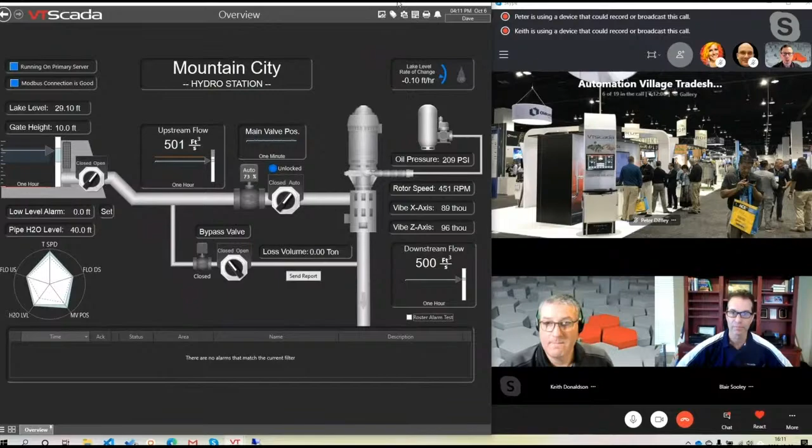So okay, I've got another computer. I don't know for sure if it will be able to connect to me or not, but I'm going to try to do that. So I've got my hydro station here, let's try to snap this guy over a little bit, make him even a little smaller than this. Oh, Skype came back, love that resize. So I've got my hydro station here, and I'm going to have my other server here.

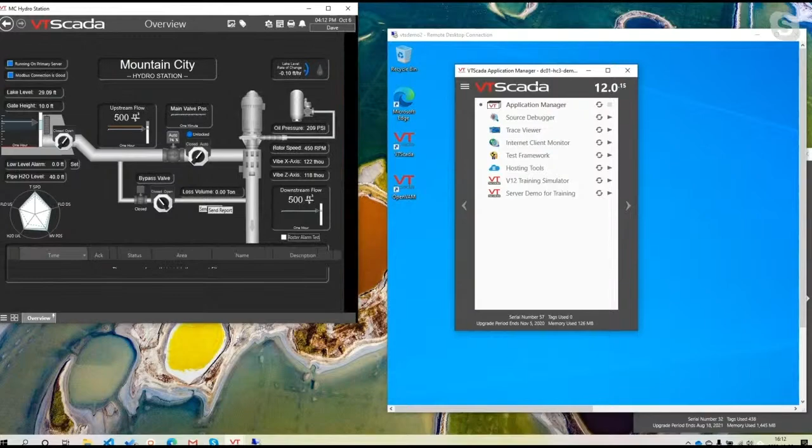So we're going to do a failover demo. For anyone watching, the first thing that I need - cool how Dave just resized his screen, and it automatically resized to whatever the resolution of the interface he has. Very helpful if you've got multiple screens up or different resolutions on your various screens in your application. Yeah, it's funny, it's the small things that we don't even think about anymore.

So what you're looking at here is a remote desktop into another computer. I'm just going to go to advanced here, get from workstation, and I'm going to hope that I can do name resolution. Can we do it?

All right, so here I've actually connected in from this remote computer that is at our headquarters in Bedford. I've connected back out to my house here, and I'm looking at my applications. So this is the Mountain City Hydro Station - that's this guy right here. So Dave lives at a hydro station, in case anyone's wondering. And oh, I need credentials, right.

So you need that administrative level credential to be able to grab an application. With a little bit of luck, this will come across. As I'm doing this over a VPN, and this demo is actually in a bit of a DMZ, so I'm not 100% sure if this will go totally flawlessly.

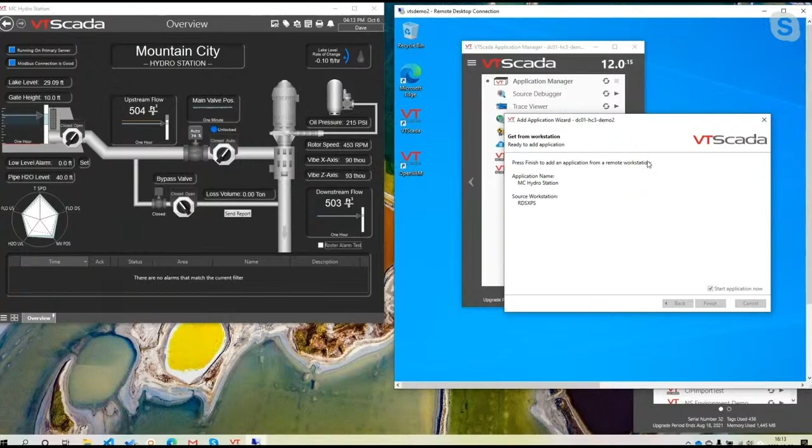If not, then Blair, are you on the VPN by chance? Yeah, I believe so. So if this doesn't work, then we may want to just do it between our computers. Oh, it looks like it did find a path here. Okay.

How much historical data have you got over there? Because it's pulling all of it now, I assume. Are you both on? You got both of them on as servers? It is pulling all of it. I'm hoping there's not that much on here. Probably collecting data at about once per second for a couple hundred.

While this is happening, I'm going to go through on this computer and do some configuration. We're going to go into the edit server list here. So you can see it's populated with my computer name. I'm just going to click that to make this guy the primary server, and the other one is VTS Demo 2 - we'll set that up to be the backup server. If I click apply, then I've set that up. So I'm the primary, VTS Demo 2 is the backup.

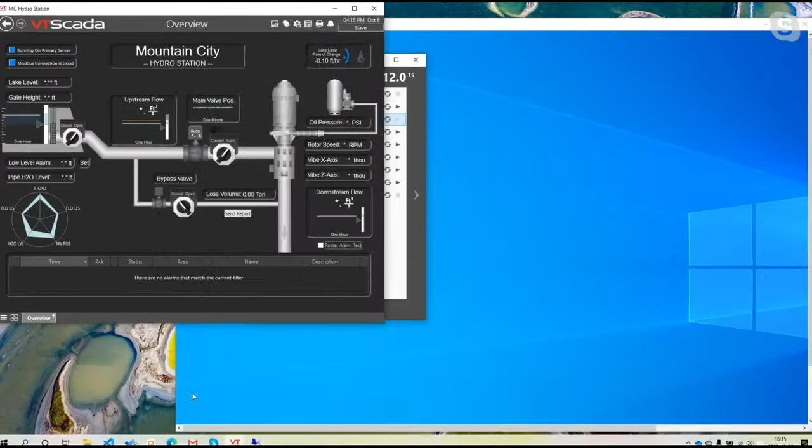Okay, so the next thing I'm going to do is run into the trace viewer. Oh, not that trace viewer, I wanted my own trace viewer. The next thing here, I'm going to grab the trace viewer, and in this case we're just going to quickly take a look at the RPC diagnostics. There's going to be lots and lots going on.

So we'll look at the services. You see all the applications that are running here are running myself as a service, but you can see here there's some things running VTS Demo 2 as a service as well. So right now things are still getting synchronized across here. It looks like I'm running into some bandwidth issues between the two computers.

Do we want to continue logging? No, I do not.

So the hydro station here, are we running? I may have a screen issue here because it looks like it is actually running the application, but I can't see it on this remote desktop. Yeah, you have it open on the second screen by the looks of it. Yeah, it looks like that may be open on another screen.

So I'm just going to stop this guy quickly and start him up in another minute here, just to see if I have a little better luck getting him on this screen. This VTS Demo 2 had Windows reinstalled on the weekend, so it sort of threw me through a bit of a loop - I don't know what it looks like anymore.

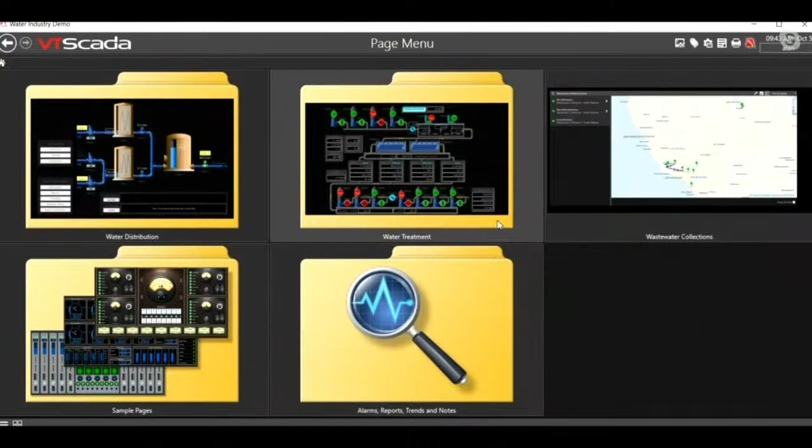So just a quick thing, and we'll go through this a little further later on. If I look at this water treatment folder, for example, we now have 4 live screens of data coming in. I think we have another breakout session on high performance graphics, on Idea Studio and those kind of things. So all of these graphics can be designed the way a customer would want them to see them. In my case, I can look over on the left-hand side under the overview, and I see not only an alarm banner at the bottom, but also this blinking red light.

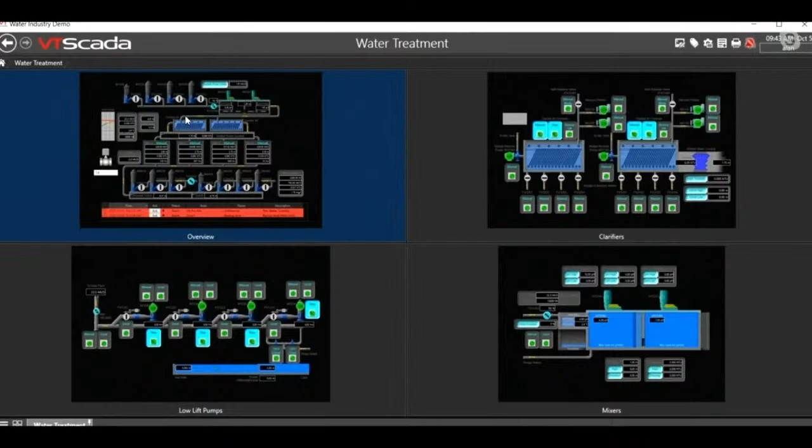And if I click on that screen, I now have a better visualization of that screen. I can see my alarms a little bit more closely here. If I look at this, we can see that it's a category of 1, and it's red, and it's a diamond. That all has to do with ISA 18.2 alarm management standards.

Again, a little more discussion for later on. But what VTScada lets me do with this is I could actually right-click on that little flashing light, and now I can do a variety of things with that alarm. I can go straight to the properties. I can look at the alarm settings and those kind of things right from the screen. But that's for a different conversation.

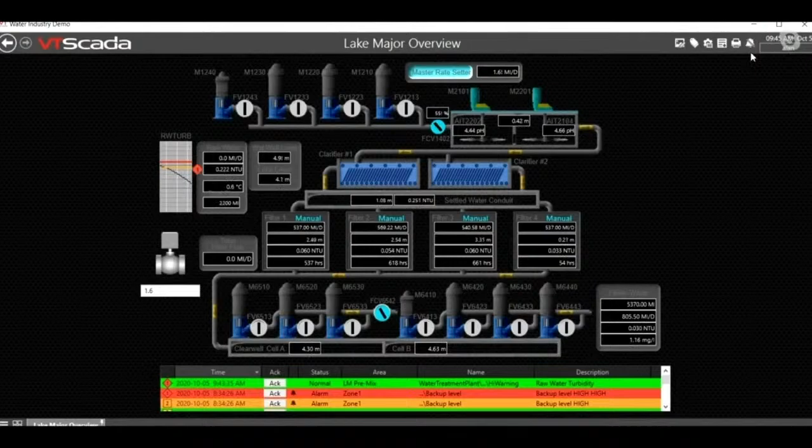Just for the mini session for the moment, I got about 6 minutes. I'm going to go to the top right-hand side. In my world, I would probably, if I'm designing a screen or I'm the operator or manager, I might not care about this alarm banner at the bottom unless I want to use area filtering to only show alarms that would be pertinent for this screen in this area of the plant. But I'm going to go to the top right-hand side where that alarm bell is blinking. It tells me I have some alarms there that are unacknowledged. If I simply click on that, I now have my alarm page.

I notice there's a lot of red going on here, and the reason for that is I have a high turbidity warning going off on and on and on. This is my demo, so it is designed to do this. Please don't be too concerned. It's designed for this. But within this, I just want to show a couple of quick things of what alarm management techniques let someone do these days.

For one thing, it lets us take care of the criticality of an alarm, or the priority perhaps. And so on the left-hand side, it shows that that is a priority of critical. So within ISA 18.2, we now have 5 levels of alarming. We have critical, which is number 1. We have high, which is number 2. Both of those would declare something about either plant safety and/or life safety and/or process safety. And then we have 3 others: a warning, an event, and a notice.

And so in the old days, what would happen is any alarm that would go off - let's just say we had a very low priority alarm go off for a low level, hey, somebody ought to go take a look at this thing in the next week. And yet, because of the way we defined alarms, it would still notify somebody at 2 a.m., which was not really appropriate. But if you had a chlorine leak at 2 a.m., clearly you want that to take place. So that's one of the things you would see here.

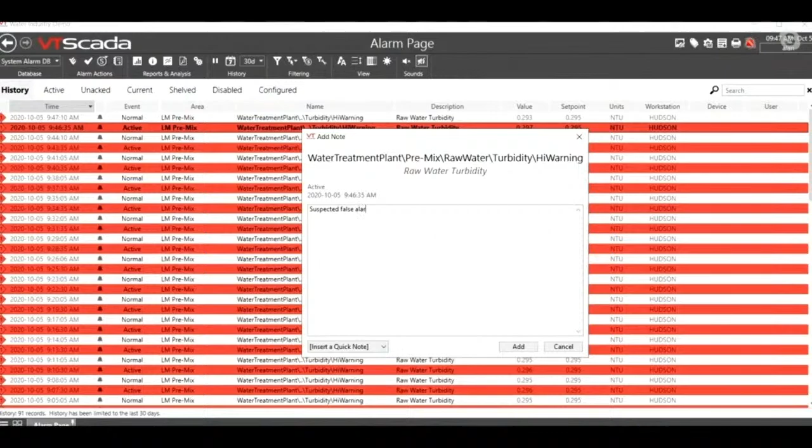What this lets me do in a couple of different ways is this. For example, I could take this active warning here, right-click, and add a quick note to this, maybe 'suspected false alarm.' How about that? So an operator with the right username, password, priority privileges could now type in a note - say 'suspected false alarm,' okay? And when they press add, you'll see on the right-hand side we now have an indication of that note. That's very unique for us, but we think it's so important that an operator has the ability of putting that in. So watch this though.

Let me go into my current alarms. Here's some things that we look at that I think are so powerful - only got a minute and a half, I know that. So I'm looking at these alarms that are current right now. I could actually click on this reports and analysis, and watch this. It's telling me that in the last 30 days - let me go to the last 10 days - it tells me that the pre-mix turbidity alarm has gone off 39 times.

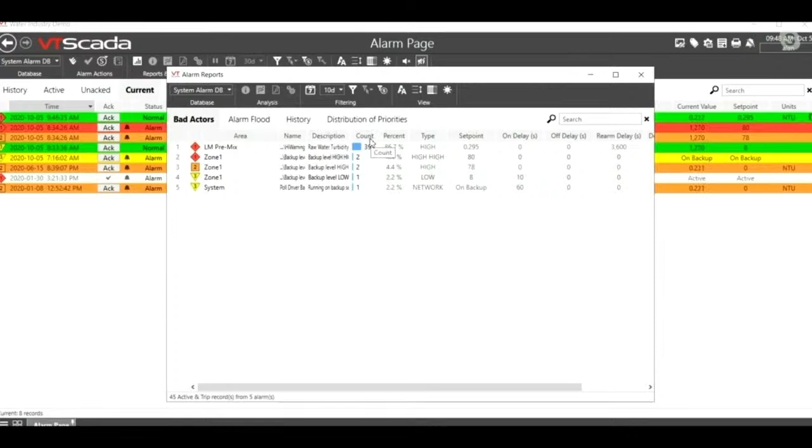So now let's say the plant manager comes in on a Monday and he sees his bad actors, as we call it, of alarms. They know what to go take a look at first. I can then look at my alarm flood and see when these things occurred.

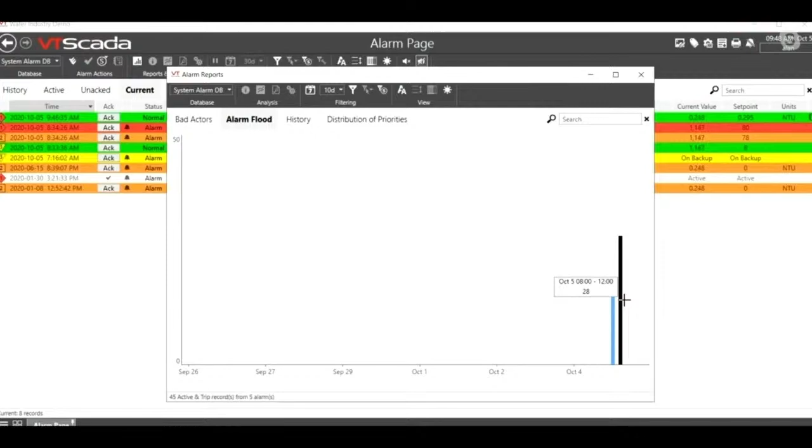Well, clearly I'm running a demo here. But what I could do is, you can see that time block is a 4-hour span from 8 until 12. If I click on that, I now have it in 30-minute long blocks. Again, those are some of the tools and analysis that really make managing alarms very powerful.

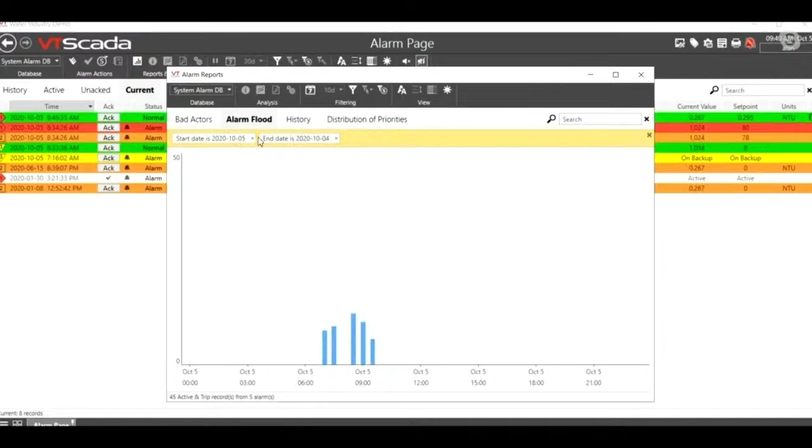You can see up here, start date and end dates. I can actually change any of that around if I want to. I can look at a whole filtering area here, and I can now filter my alarms by certain descriptions or other areas or different dates and times and whatever. All of that becomes how I want to manage my alarms, to look at it more closely and make things happen.

Let me finish out with one quick part here. It's my favorite part of our alarm management, and that would be shelving of alarms. So I started off with that story about the alarm annunciator and the guy pulling out that board an eighth of an inch.

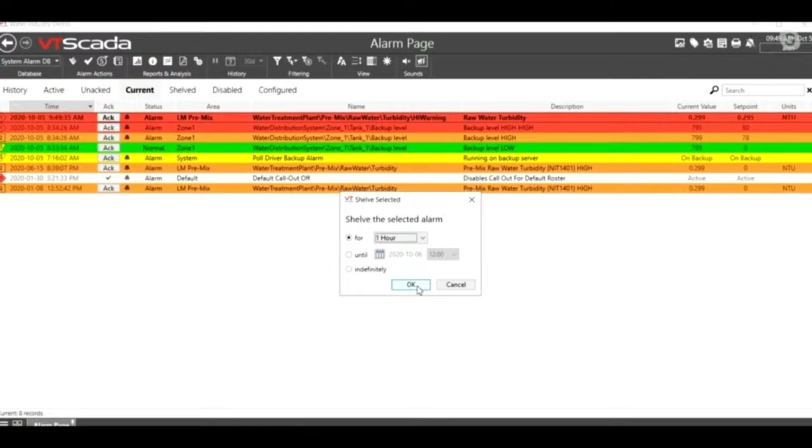Let me take this same turbidity warning. I can right click on that and say, you know what, I'm going to shelve that. And you know what, George ought to go take a look at this suspected false alarm, and I'm going to shelve it for 1 hour because he just stepped out to go browse the hall, and he'll be back in an hour. I press OK. I'll put a note in there: shelved while waiting on George.

I think that's who I said - while waiting on George to return. And then, lo and behold, I press add. It is now off of my current alarm list.

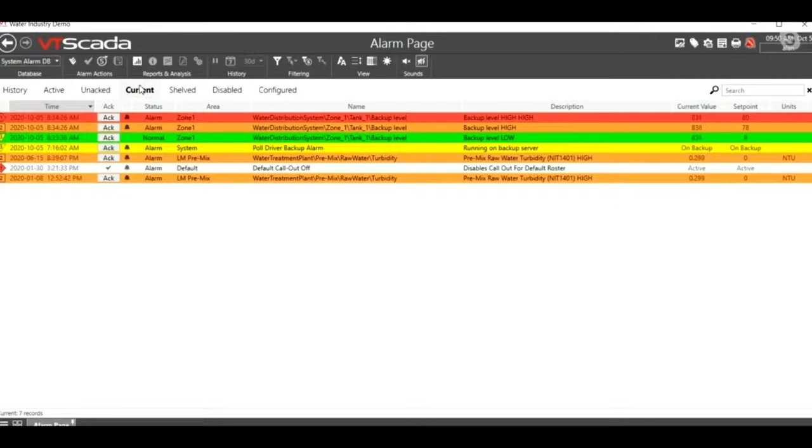George comes back from browsing the trade show hall. He can click on shelved. He can see every instance of an alarm that was shelved by an operator. In fact, in this case, it would say it was shelved by Alan under the user on the far right-hand side. And then here are the notes associated with that.

So how cool is that - you can now give complete control of alarm analysis into your operator level people. So I know I only had 10 minutes, but my time is up on that one.

I will unshare my screen because you're probably saying, hurry up, Alan, get out of here. The elevator has long since stopped. Yep, you're doing a great job, Alan. And next up, Chris and I will struggle to answer questions that will keep us our jobs. So I was quite happy if you were going to go through. Hey, what I have found over the years is if you make things complex enough, nobody asks too many more questions. There you go.

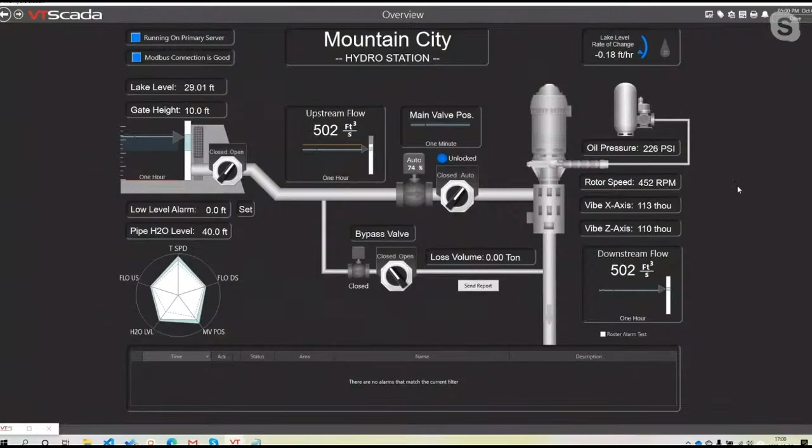So anybody who wants can go into any page. If we want, I can even grab a widget here, copy it, and go into Notepad. So I copied Control-C, Control-V into Notepad, and there you'll see the code for that widget, right there, just as text. So I could actually make changes to it if I wanted to, and paste it back right in here, and it would appear as an object on the screen. So you use the term object, and VTScada does use an object-oriented scripting language, for anyone who's questioning that.

So at this point, we've moved into our next segment, the hands-on demo. Do you have a preference - do you want to do some dragging and dropping, or shall I? I'll let you do it, I'll comment on it, and then I can share my screen after and do mine if you'd like. Okay, let me switch screens. There we go, can you see my screen? I can now, yes. Okay, great.

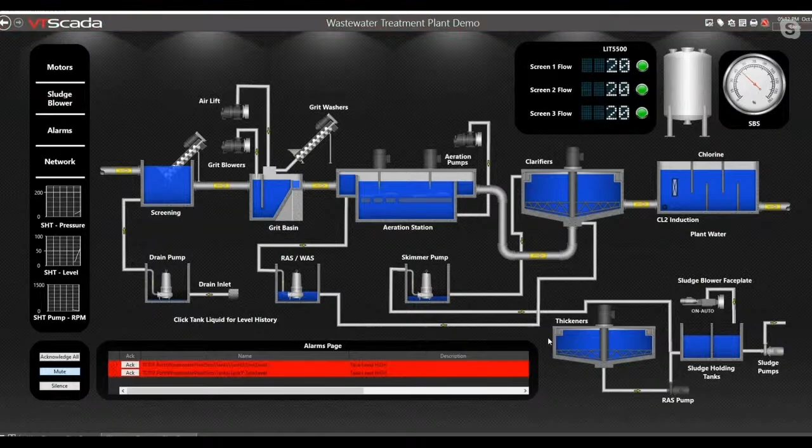So this is just our wastewater treatment plant demo, which you may have seen a few times today. As we've mentioned, this particular screen was created all with drag and drop elements. If we go to our tiled page menu and navigate around a little bit, you'll see this menu itself was built out of the box. It's one of those standard features that when you create a brand new application, you don't have to set up at all. Every time you add a new page as a developer, it asks, do you want me to add this to the menu? And you say yeah, and it gets added to this tiled page menu. We've got these three pretty pages, which were all made with our Idea Studio using built-in widgets and images.

These are basically meant to drag people into the trade show booth. They're not super great HMIs, but they're pretty impressive on a trade show floor and a great way to start conversations. But they were all created using the Idea Studio.

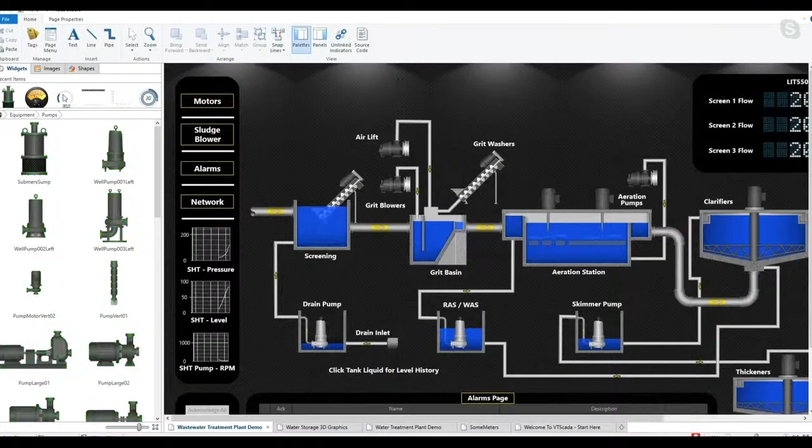So I'm logged in here, so I'm just going to open that up. And this is what it looks like. If you take a second and get your bearings and look along the top of the screen, you'll see a menu that looks very familiar if you've ever used Word or PowerPoint or anything in Microsoft Office. I'm assuming almost everybody has had that experience.

So it's a context-sensitive menu. If I select an image, for example, I'm able to immediately access the properties that are unique to that, or I can simply right-click and go Properties. There's always a couple of ways of doing things.

Now, of course, we're all dragging and dropping, so I can go into any of these folders full of pre-built widgets. And a widget - I think every SCADA platform has their equivalent of what we call a widget - it's basically a fused together combination of I/O data and images and shapes. This one is meant to take a parameter, which is an analog status level, so I can just drag that on.

Our widgets, Chris, from what I've seen, is when you drop them on there, they always have behavior to them, almost like a simulator that's kind of running, moving the needle or so forth. So you get an indication of what that's really going to do for you when you hook it up to an I/O. And that's pretty unique to VTScada - I've never seen that with any other SCADA packages.

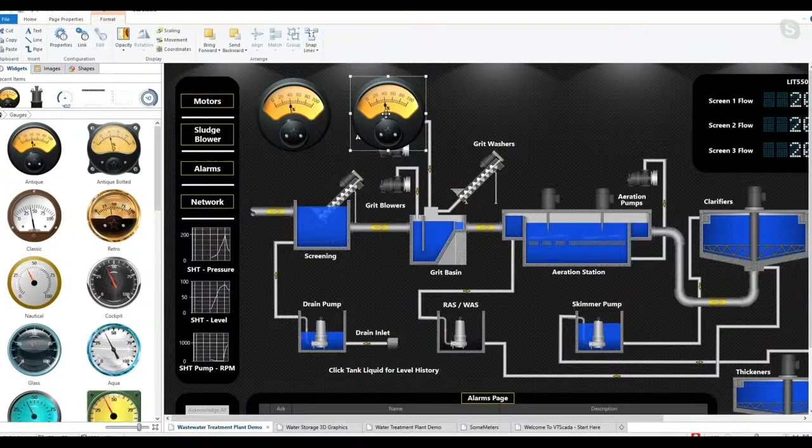Something I find when I look at applications created for the real world, and frequently this is true, they aren't beautiful. The screens, all the data's there, they got it there, they hit their deadline, but there's not a line item on a spec that says make everything line up so it doesn't make A-type personality people crazy. VTScada kind of makes it difficult to do otherwise.

You can very easily select multiple things, you can align them very easily, they give you sort of a guide. If I do that again and hit Control-C and V, you'll see it's automatically giving me a sense of when things are lined up. When you're lined up, it has those little grid lines that pop up. Yes, exactly - I've had too much coffee today.

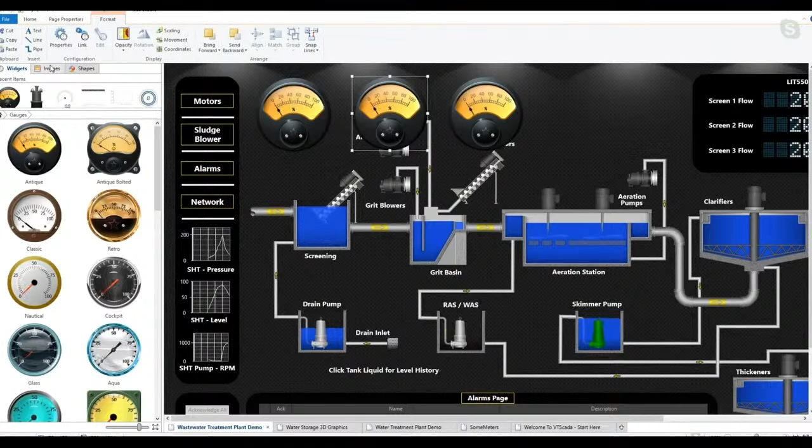What you can do is drag everything onto the screen, make it look just the way you like, and then decorate it with various kinds of images. Actually, you can see here we've got this lighting effect built in that simulates a discrete area. So these things can be decorative, of course, but they also kind of focus the eyes, and can be used to create these discrete functional areas.

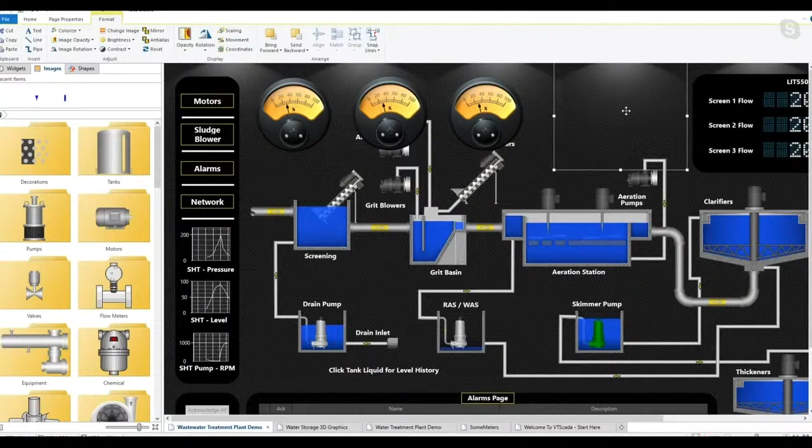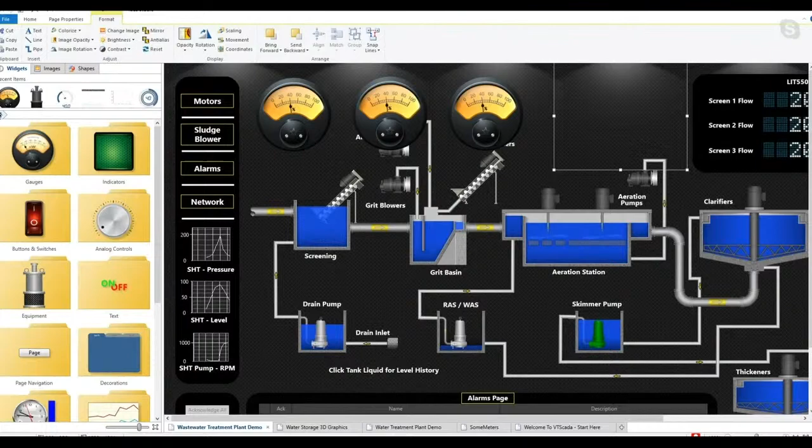And of course, this is not a high performance type screen - many of you, I'm sure, are already shouting at your monitors. Over on the left, you can actually see some more high performance style widgets and shapes that we've got. Actually, the widgets look like this. All these widgets are built in, and to support high performance or any kind of screen design methodology...

You can see that just like Tim just said, that dial pointed out why that dial is cycling back and forth. Similarly, these shapes are cycling through color to show you that you can put process data through this widget to adjust its color, which is part of the methodology of high performance HMI.

So I'm just going to show you something really fun here. I'm going to take - I got 3 minutes. Well, that's good, I think that works out perfectly. I'm going to hit Control-C again because we have to cover the scripting part of this, so we'll do that in the micro, and then we'll do it in the macro.

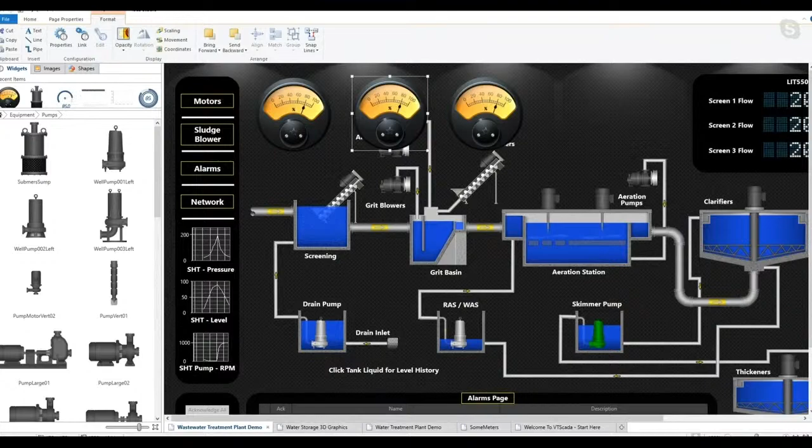So I'm just going to open up a notepad, and I'm going to hit paste. So I just copied the dial and hit paste in Notepad. Oh, I'm sharing my screen, not my window. Okay.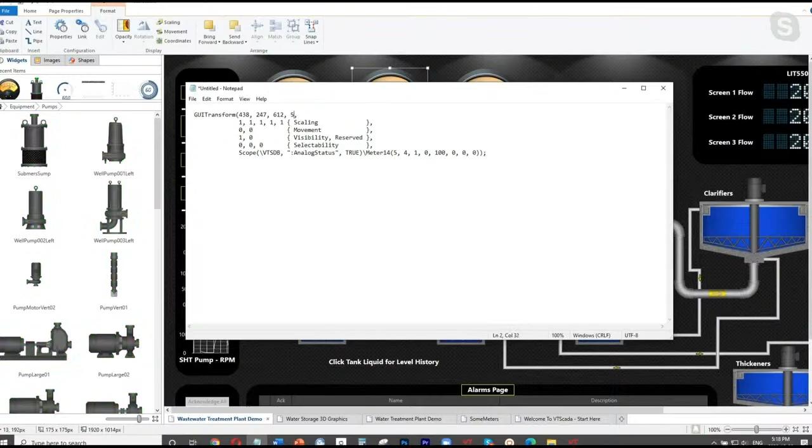So this is what that dial looks like in VTScada script. I can actually go in here and make some changes, although off the top of my head I don't know exactly what will happen. I guess these are the coordinates for the four points of the dial. I'm sure if I change them it would make it look quite weird. Let's make it look weird and see what that looks like. Now I'm going to copy this back, go back to the screen, and hit paste. And there it is.

You can see it's actually slightly oblong now because I've just gone in and messed with the coordinates. But that's an example of very quick, rapid prototyping - you can grab an item, quickly adjust its code, and drop it back in again. And if you want to see all of the code for this page, you can go to the source code button, and this will open up the VTScada script for this page in your chosen tagged text editor.

In this case I'm using Ultra Edit, so you can see it's very similar. They all kind of follow this similar structure. Once you get into it, it doesn't take very long before you start to read the code as if it looked like dials, kind of like looking at the Matrix. So again, you have the best of both worlds - you've got the control of being able to work with script, and the flexibility and reliability of working with standard drag and drop features.

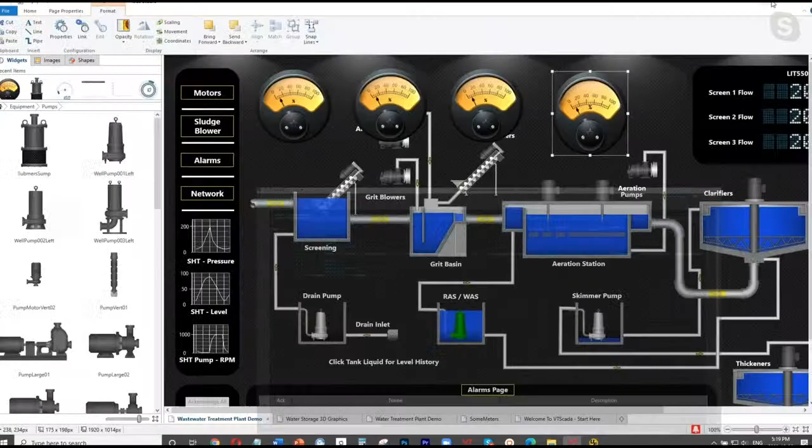Now we're sort of coming into the finish line here. Tim, is there anything I haven't covered? I was going to point out you were doing your selecting when you pasted down a couple of different gauges.

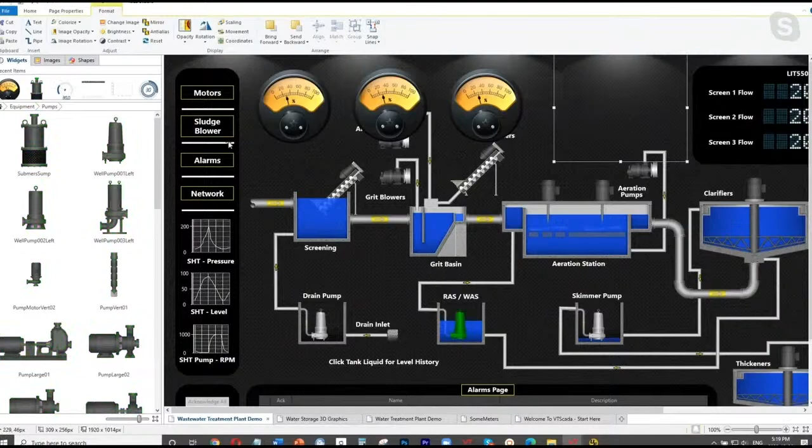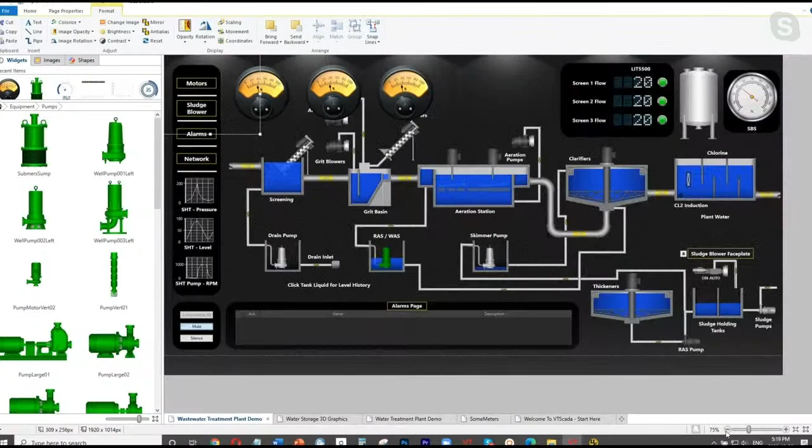What I really like about VTScada is there's so many different ways to select objects on your screen. If you go from left to right or right to left, it changes the way you're selecting those. If you go left to right, you don't have to have the whole object, just a piece of it. But if you go from right to left, you select the whole object, and only those objects get pasted into your grab. It's true, so I just went left and selected. I think you go one way and you get everything that you touch, and you go the other way and you only get the things that you completely cover.

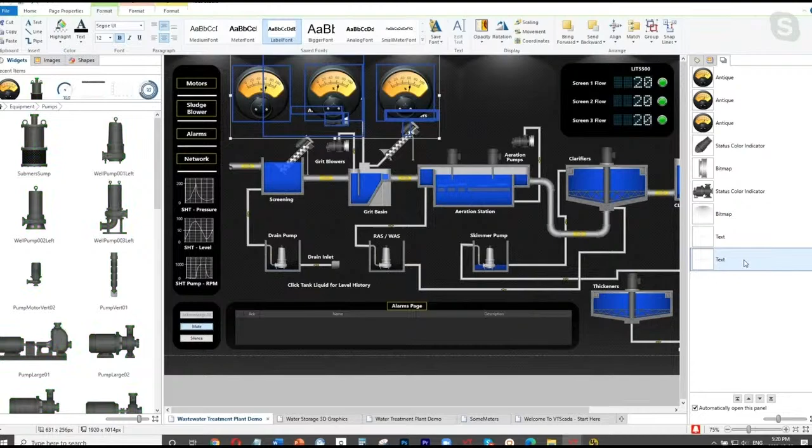And then also from the menu bar, you can select - let's say I just want to select the text on my page, I can do that as well. Exactly, over here, so you don't have to go and hold your control key down and click the particular object. Oh geez, I missed one - oh no, and then go back and change it. We make it a lot easier for your screen design to be able to select things a certain way.

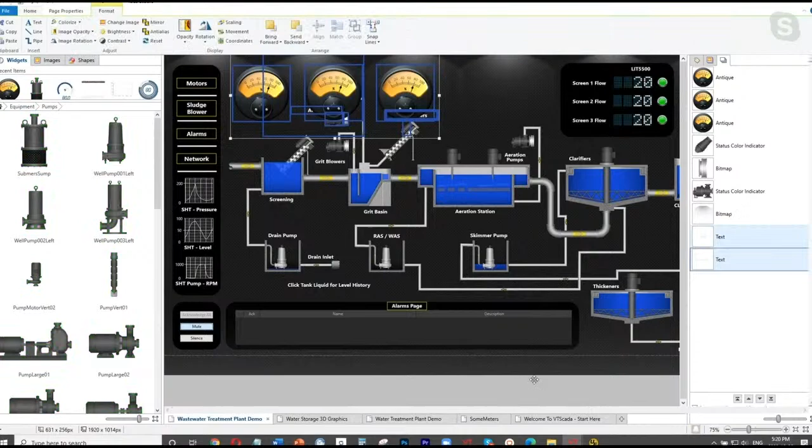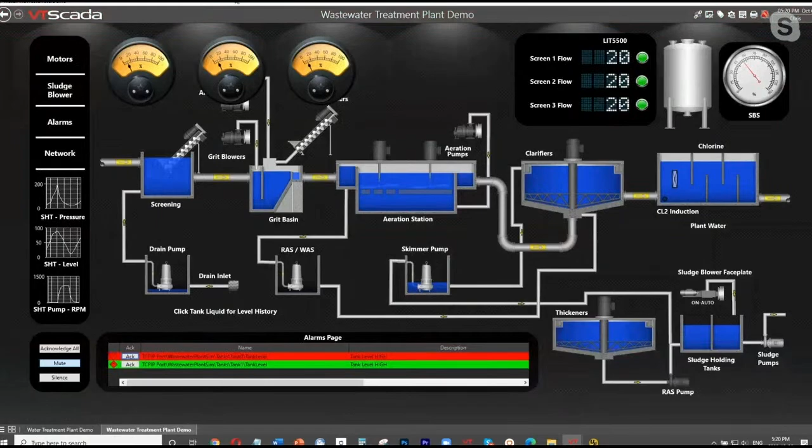That's true. And now I'm going to hit X to close the Idea Studio, and those will now be added to my screen, which is actually up here. There we go - not the most beautiful aesthetic choices that I've made, but I'm going to stand behind them unless I want to use version control to go in and roll them back. Hey, for a Tuesday afternoon, they look great. Thank you, this segment should be called 'Chris is Getting Punchy.'

So that's just sort of the briefest mile-high view of the difference between using scripting code and drag and drop features when designing screens.

Great, so I'm going to stop sharing and look back at our lineup here. Look at our notes here. I think we have another... we're at 20, so Tim - I think you get to do some driving now. Okay sure, yeah, I can go ahead and do that.

So I think what we have up here is trending. That's pretty wide open - I mean, we could be historical trending, we could talk about our trending widgets, a variety of different things. So let me share my screen. Give me one second, share screen.

And open up VTScada. Okay, are you seeing my tile? Sure, how's that, better? Great, still see you. Oh, fantastic.

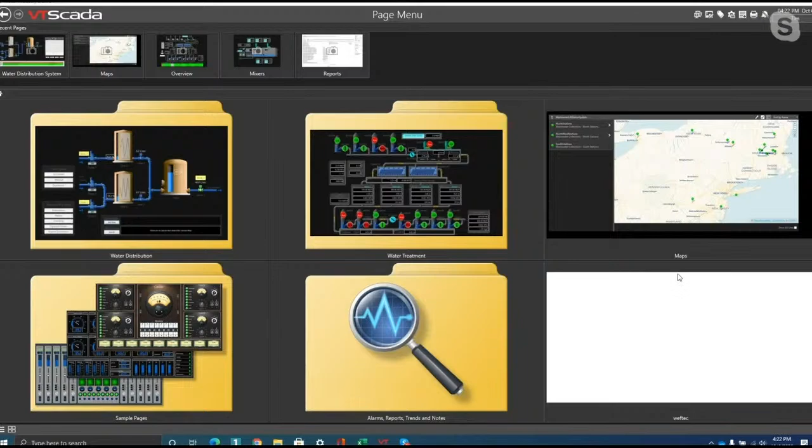So Chris has kind of gone over this particular look here. I'm going to get into it. First, I want to show you the historical data viewer and then some other trending items. I'm going to open up one of my screens. That is probably one of the features I like the best about VTScada. Actually, it's the feature I like the best.

I don't blame you, it's great. Goes back to it might have been one of the first things I saw with the product. In a demo application I built in a previous life, we built a lot around the historical data viewer, creating different pen groups and flipping between different screens for some analytic looks on some data. And just the flexibility of it, I was very intrigued with it. So that's what I like about it.

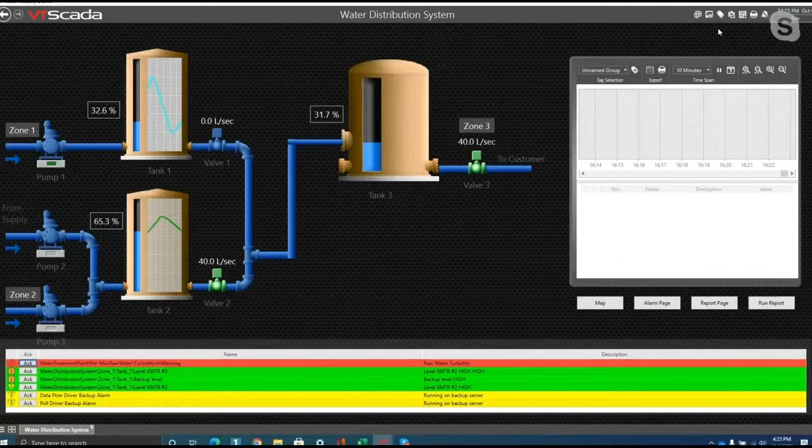What I have here on my screen is I actually have the historical data viewer built into my screen, but you don't need to use it from here. You can simply just go ahead and click on a value on your screen, and it will pop your historical data viewer.

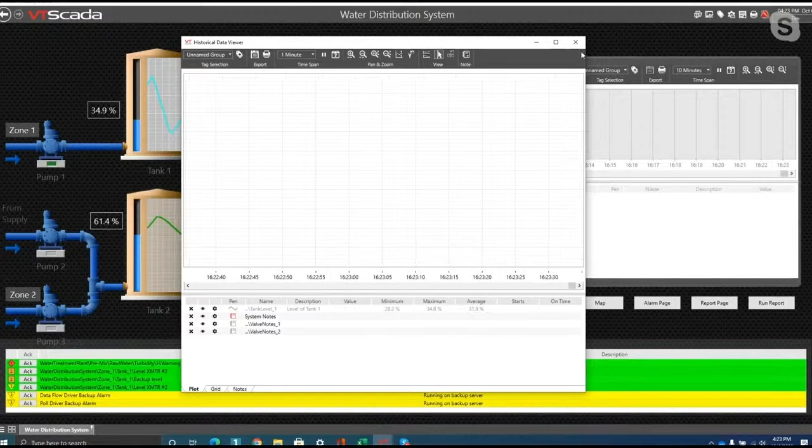And how come I'm not seeing any data? Oh, because I have the pen turned off. Let me make that visible. So I must have turned it off in a previous demo.

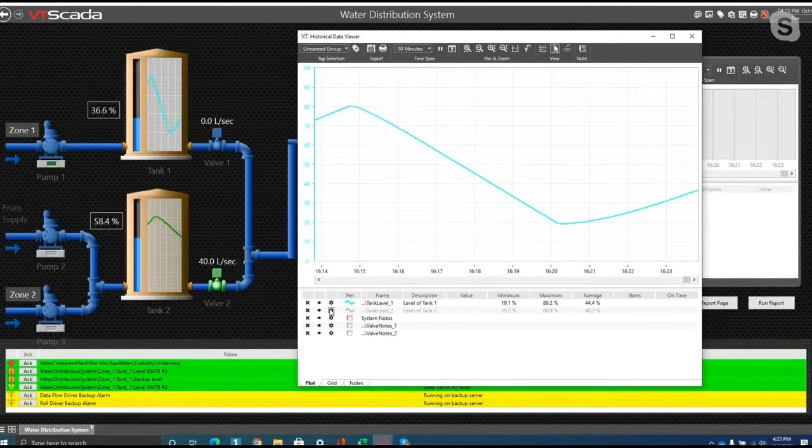Okay, so I can click on one. I click on tank 1. I'll click on tank 2. And again, I have that turned off. We click on tank 3. It shows how hard you've been working today.

Yeah, I know, I didn't use version control to get rid of everything, so that's why I have some stuff turned off. I was playing around with some different pens and turned some off, I guess, earlier this morning.

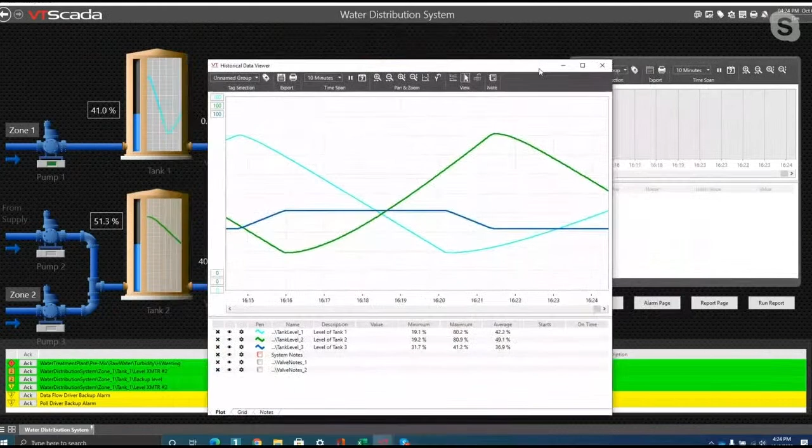But as you can see, I just dragged and dropped 3 different pens onto my historical data viewer. There's a lot of, and I can make this bigger or smaller as well. It's just an overlay on top of my screen. So I'm looking at some analog values. I can take these values and put them into different plot windows, or I can keep them all in one. Really, the sky's the limit on that.

What I want to also show is I can add some digital signals to this as well. So I'm going to go ahead and add some pumps as well. So it takes all my analogs, puts them together, and then takes 2 digitals and puts those values down here. Again, I need to turn those back on to see them.

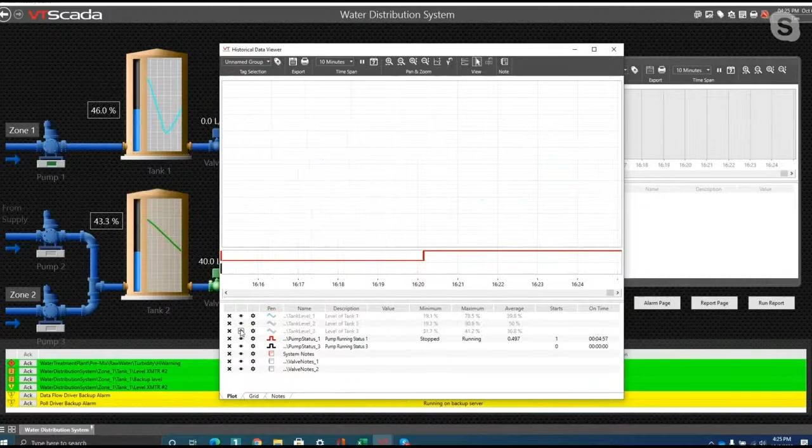So let's talk about what we see down below. Very easily, I can turn pens on and turn pens off, which you're seeing me do. And then I can get into the configuration of the pen itself. And this is all in runtime. I'm not in development at all. I'm strictly in my runtime environment.

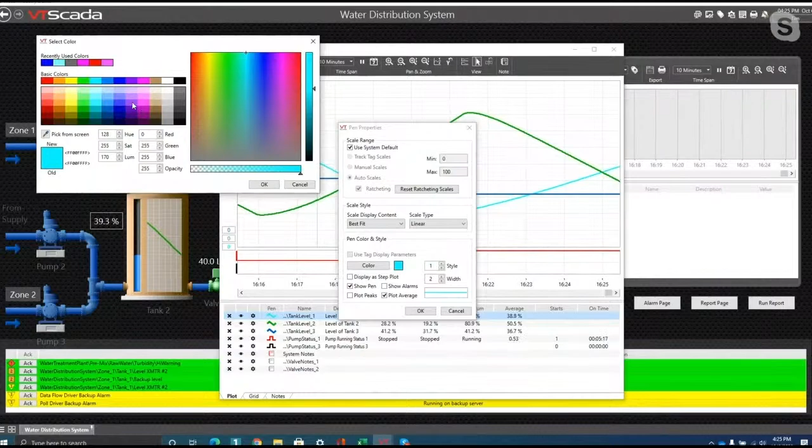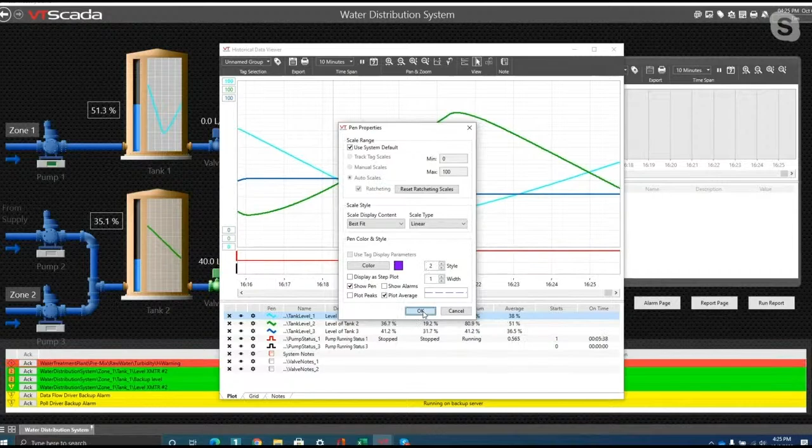I can change my color of my pen. I can make it from light blue, I'll make it over to we'll make it a purple pen. Click OK. Now, wherever I use that particular pen, it will pick up that purple color. I can change the style, I can change the width, and then also I can show the pen, plot peaks, plot average, show alarms if I wanted to. A variety of different things I can do with this. We'll just change the style of that. So anytime I'm using that pen anywhere, it will show it.

What I'm showing you, I am using my historical data viewer. But I'm not just looking at historical data, I'm looking at data in real time as well. So it's a real time and historical data viewer, kind of all built into one. It's best of both. That's a real important point.

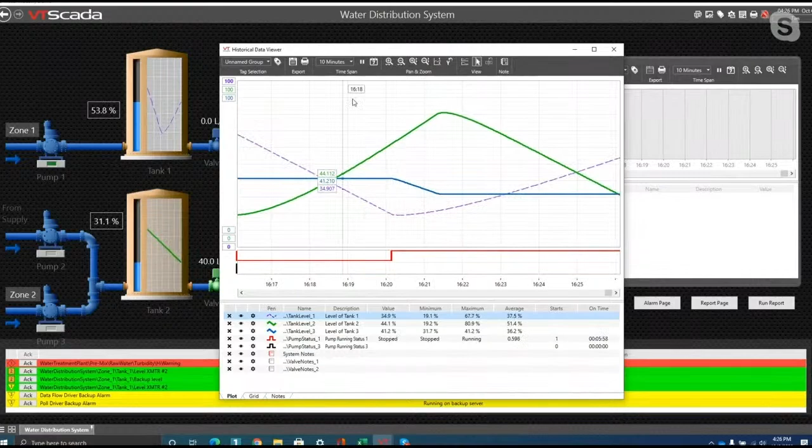Yeah, and what I can do is I can look at it in different intervals. I can look at the last hour, I can look at the last 6 hours if I want. This is a break, I must have turned my demo off and turned it back on, so you're seeing a break in the action there. If I go to a day, this must have been yesterday, and then this is this morning when I started up my demo. So let's go back over and look at just the last hour or so.

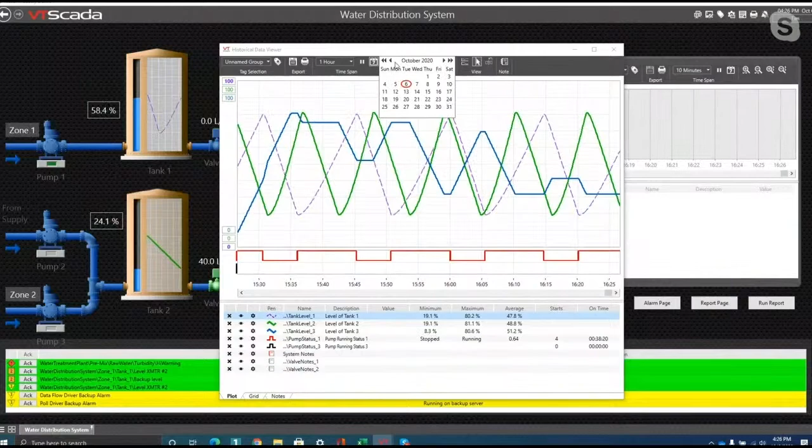But not only can I do it that way, I can pick a date and time when I want to go back and forth. So say I'm looking at data from the 6th. Let's go back to the 5th and look at my data, then span that out to a one-day view. And here's my data from the 5th.

Let's go back over to real time and back to a day's view. We'll just go to 12 hours. We'll go back over to an hour. I can pan and zoom around. A lot of different features we can do here.

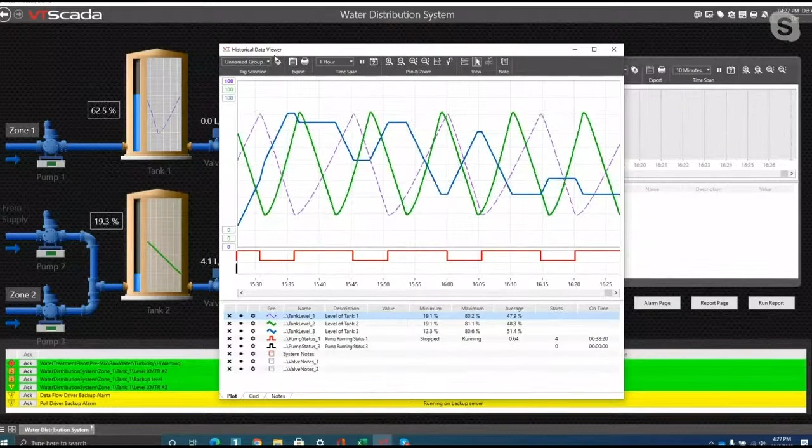I can also come into here. I want to reuse this pen group somewhere else, so I can come in here and give it a name. I'm going to come into my browser. I can add more pens to it if I wanted to. I can filter my pens by name, area, description, type, and so forth. But all my pens are listed here, and the ones I've selected are down here.

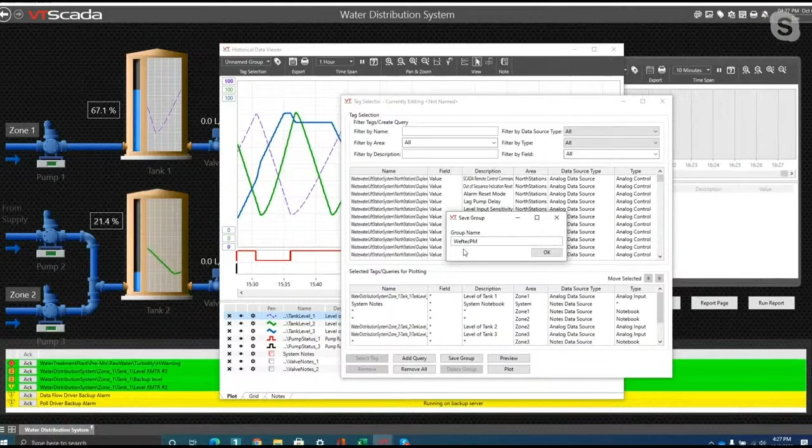Let's go ahead and save this group so we can reuse it at a later time. We're going to call this... let's call this WEFTEC PM. Because I think I did something this morning and probably called it just WEFTEC. I'm not quite sure, but I don't think I've used the WEFTEC PM name yet today. So we'll save that out, and let's minimize this.

We'll leave that historical data viewer here. But say I was somewhere else in my system and wanted to see this particular screen, I want to use this pen group somewhere else. I can come over here—here's the screen that I have. I can come in here and pick WEFTEC PM, and there's my data. So it's the same pens that I selected when I built out my historical data view. Now I'm using those within my application somewhere.

So really, really quick, down and dirty—there's more you can do with the historical data viewer, but we're supposed to be talking about trending, so I'm going to get back on track. There are sessions over the next couple of days on historical data viewer, so if you want to learn more, you can go see one of those.

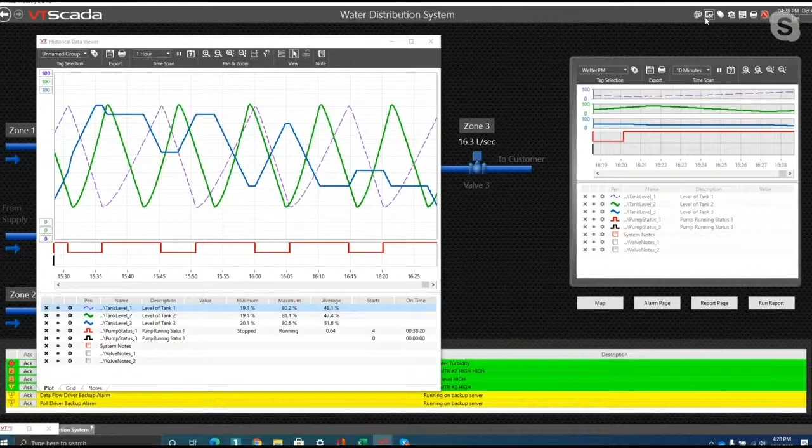Let's go over to the Idea Studio. I think I have a couple more minutes left, so I'm going to go into a new screen, a new page. We'll call it Page 30, keep it easy, and add it down here.

Okay, so Page 30—Chris was in this environment before, grabbing some gauges and dropping them onto the screen. I'm going to come into a different widget folder, into my analytics folder, trends and historical data. In here are some different trends you can use for building out a screen.

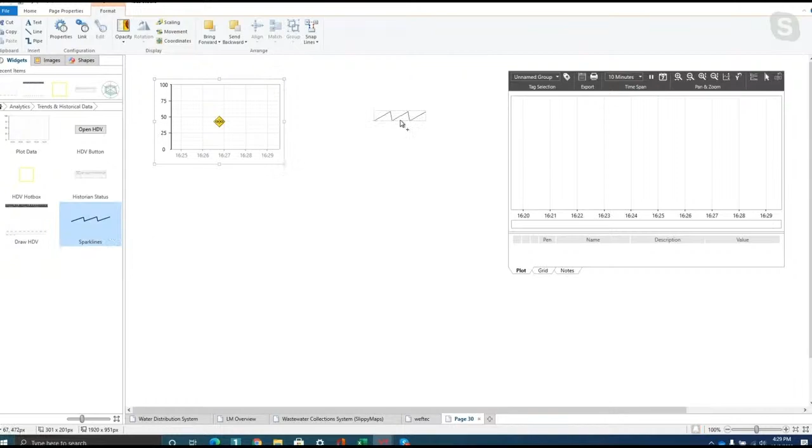If I wanted to use that historical data viewer, I'd drop that onto my screen, which I did—here it is right here. Say I just wanted to plot a single pen, I can drag that over and drop it. If I wanted sparklines, that's a new feature in version 12—it doesn't have your plot behind there, but you can add a reference line and so forth. It's a really cool feature. I can drag that onto my screen as well.

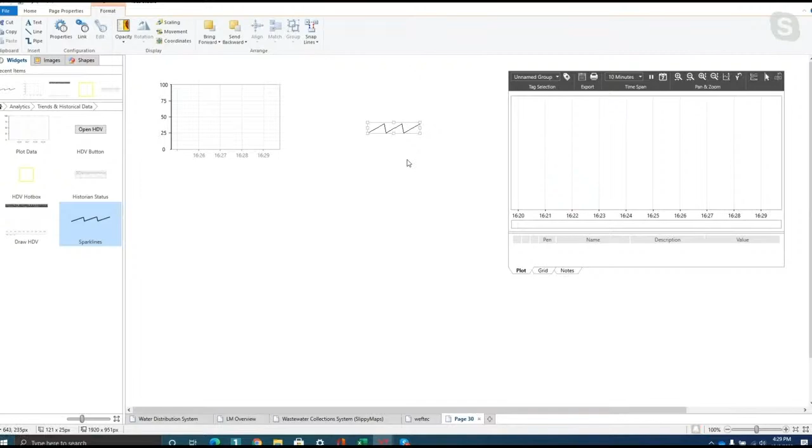We can go ahead and get into the configuration and connect this up. So I'll come into properties, connect this guy up to a tag. Let's go into water distribution, zone 1, tank 1. I'll look at the level.

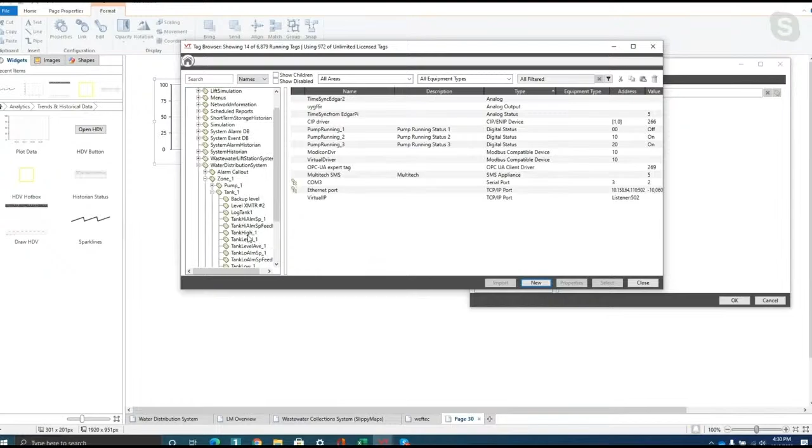Is there a question, Chris? No, you're filling the time beautifully.

Okay, great, thank you. And I'll pick select there. So notice that it gives me that purple color we were using before, with the dashes. That's how we left that pen last time, so it carries that through my system.

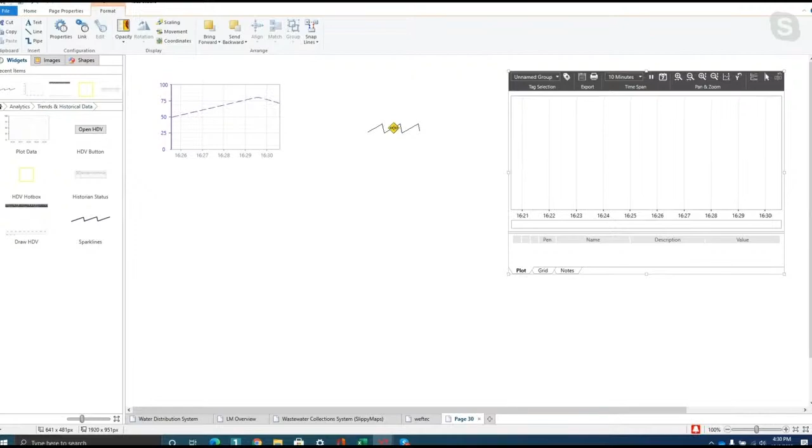I can come over to my historical data viewer and configure that as well if I wanted to, or I can go right into runtime. This is my historical data viewer that I had open from before, but here's that page I just built. Obviously, this is an unlinked widget that I dropped on, but here's my single plot.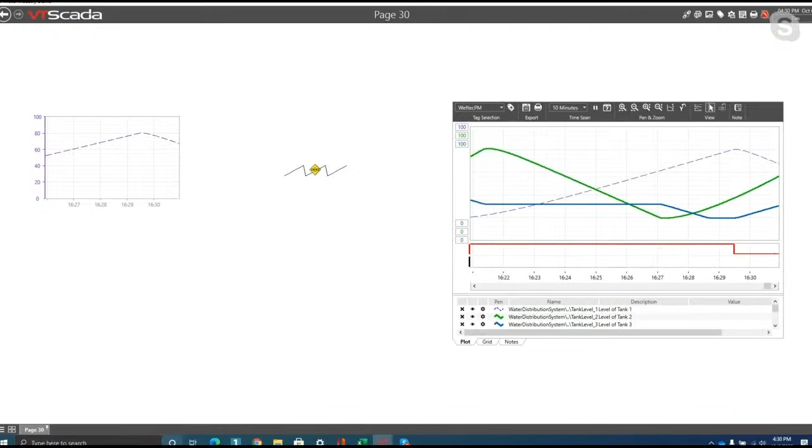Over here is my plot view that I dragged and dropped, and I can go ahead and select that WEFTEC PM pen group and have it populate as well. Or I could have configured that within my drawer environment—either way. I think we are out of time here, so I'm going to stop before I cut into someone else's time.

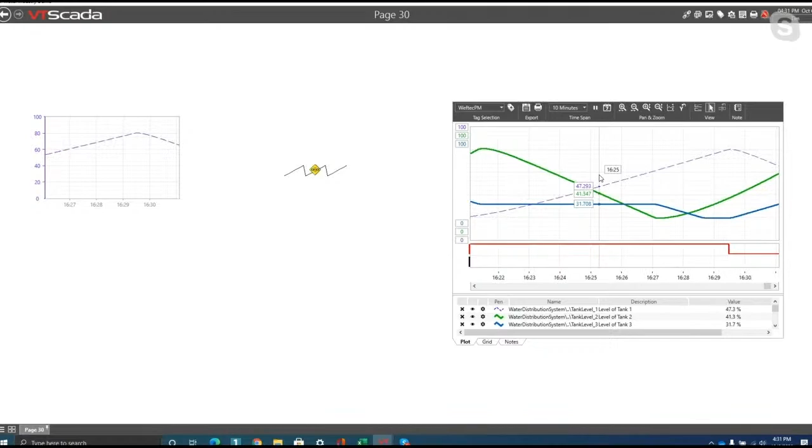Yeah, that's really great. The sparklines are great because if all you want to know is, from across the room, what's that tag been doing in the last 5 minutes or 1 hour, a sparkline is a really great way to give you that immediate context without pegging your system, without being a resource hog like a full trend view would be. Not that they're that intensive, but the more efficient approach is to add that little sparkline.

Right, very good. So now we've got Mike Stark back again. Hi Mark. Hey Mike, what's going on, Chris? Hey, that is okay, I get that all my life, and here's why. I'm going to make you feel better, Chris. I'm sorry, Mike. It's okay, Tim, whatever your name is. So Mike Stark, and everybody goes Mark. The only thing I would say is, how in the world would anybody name their son Mark Stark? But there's probably a bunch of Mark Starks out there, and if there is, please talk to Chris Little here about that. Anyway, no worries, my brother. Mark Stark, and you have a cousin, right? That's right, yeah, just call me anything, don't call me late for dinner, man. That's the thing, there you go. So you had, what's that?